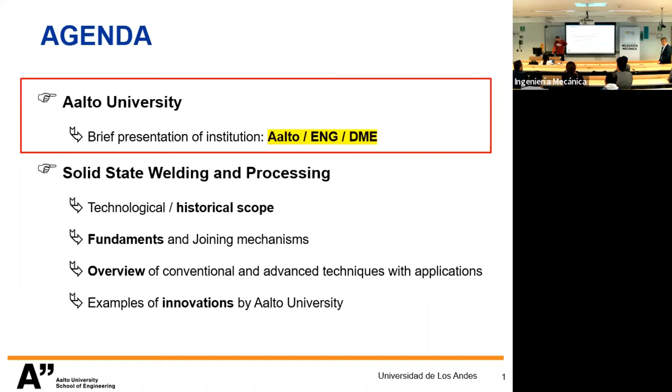Aalto University is located in Finland, north of Europe, in the city of Espoo, very close to Helsinki. Our campus was designed by Alvar Aalto, a magnificent and distinct world architect, and we took his name, and later on you will understand better why.

From where we are to my home university, we have over 10,000 kilometers distance, but fortunately we have open minds and willingness to make this distance very short, taking advantage of our willingness to learn and share different cultures, which brings additional benefits beside the knowledge.

In comparison, the population of Finland is 1/10 of the population of Colombia, with a smaller area and much less population density, yet we represent a very interesting amount of per capita gross domestic product. We are very proud of the cooperation with Colombia, one of the most distinct growing countries in the world.

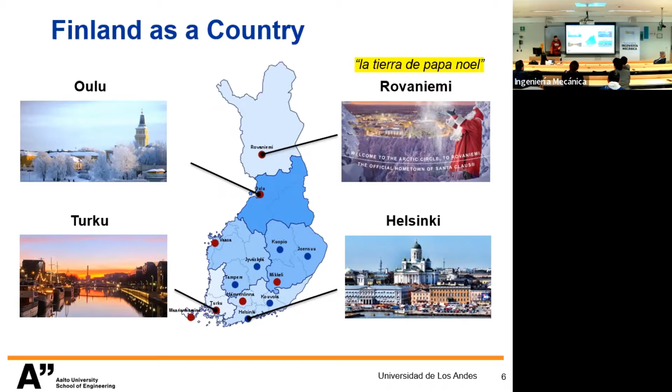Culture is very important - we feed our spirit with culture, distinct aspects. We have this Lapland, Laponia region.

Outstanding is that the country encompasses about 200,000 lakes, and we only count the ones bigger than 500 square meters. We have beautiful landscapes, natural reserves, long sandy beach places, a beautiful archipelago, the Baltic Sea, and magnificent parks all over the country.

Very important in terms of supporting quality of life is the economic impact of the world of industry, and the most important aspect that Finland reached since the Second World War was the installation of world-level competitive companies.

Among these, we have the biggest producer in stainless steel production, Outokumpu, and SSAB, a very important steel mill producing special steels, oriented mostly toward high-strength steels in sheet metal and plate. Meyer Turku is an outstanding shipyard producing large-scale ships and boats, including dedicated production of ships for traveling in ice domains or operation very close to 0 degrees.

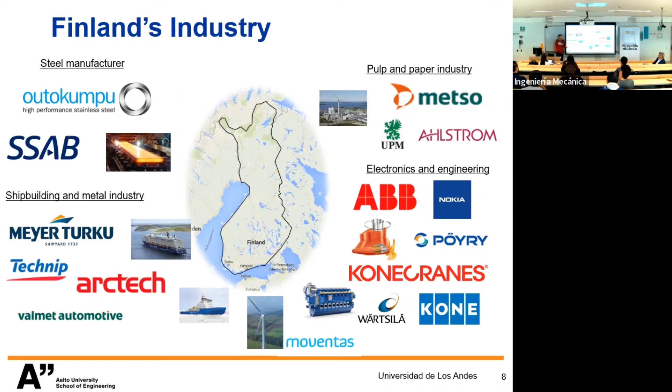And Moventas now also a major player in gear systems for windmills. So we have these outstanding companies that, in a country of 5 million people, play a role of being among the best in the world. And this is the source of this happiness and quality of life. But this feeds also from the education.

Aalto University is a very recent university in terms of installation of its name, but it's based on the merging of significantly old universities, like the Technical University of Helsinki, the University of Arts from Helsinki, and the University of Economics. The name of Aalto is honoring Alvar Aalto, a pioneer of modern architecture and design, who was a professor at MIT. He was an entrepreneur and an artist, a technical artist from architecture but also from design.

And so his name encompasses this technology, art, and business. That's why we adopted, very honorably for us, the name of Alvar Aalto University.

In terms of strategy, research, education, and impact are the three pillars of any university in the world right now. Distinct in our approach is that education and impact are supported by a deep investment in research, and we transfer actively, even in bachelor and master education, but also in doctoral education, the research actions, and we collaborate with companies in aspects of innovation, not so much in aspects of service.

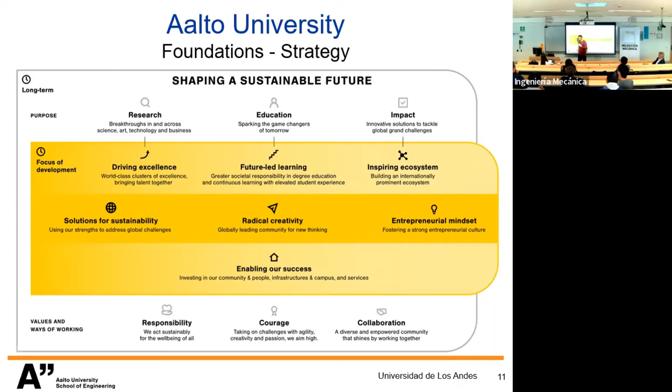So we are committed to impact, promoting innovation in companies and setting up new companies in the economic sector. In terms of numbers, we have about 4,600 staff members, with about 400 professors, and 12,000 students, encompassing master and bachelor students, and we have 1,000 employed doctoral students.

We don't call them doctoral students anymore. We call them doctoral researchers, because we are very proud of providing conditions for them to set their life on a base in terms of funding, conditions for implementing their innovations, and promoting them for further steps in their life. So our doctoral researchers are already active members of society, rather than just students.

I think this number is outstanding. There are not many universities that reach this number of academic faculty staff. 47% is international, and I am one of those examples. So we look for the best, and we don't look for the easy or the local ones.

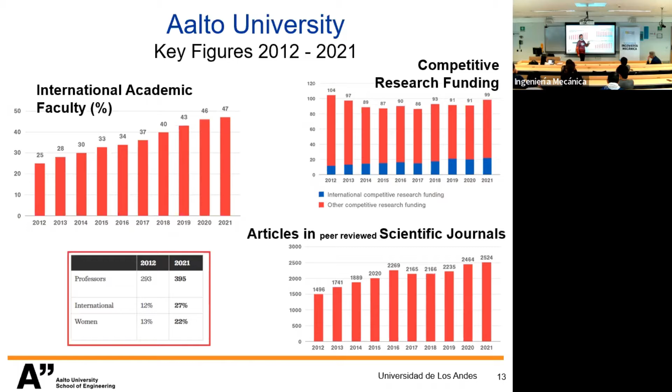This is one of the most important things. Our ranking: in the QS ranking we have 116. Shanghai ranking is between 300 and 400. We have tens of thousands of universities in the world, so this is already very, very impressive.

And among the young universities, we are first in Finland, among the first in Nordic countries, third in Europe, and ninth in the world. Not sure about this ranking for university level overall, we are about 220 to 250. It's already very distinct.

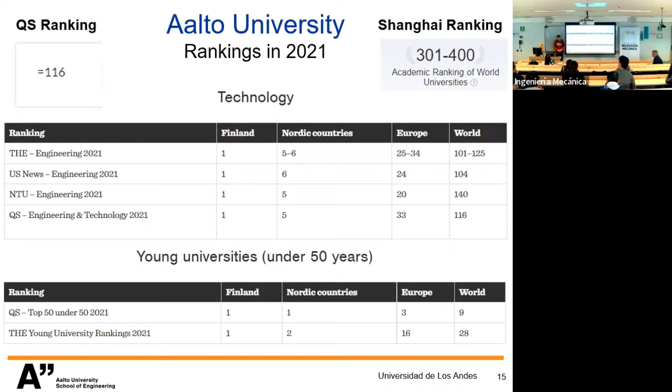Our university operates in terms of research and education, organizing 6 schools. From the Technical University of Helsinki we now have 4 schools: School of Science for IT, chemistry, and physics, through the various scientific aspects and market, then the School of Electrical Engineering, the School of Chemical Technology.

And then the School of Engineering, which encompasses mechanical engineering, civil engineering, and built environment. And then the School of Business, from the previous business school of Helsinki, and the School of Arts, from the previous art school of Helsinki.

Our School of Engineering is organized in this department, as I told, and we are very proud of having some distinct infrastructures like this Aalto Ice and Wave Tank, which is a leading infrastructure of excellence in the world research in ice. And we are located at this very high 60 degrees latitude.

Compared to about 6 or 7 degrees latitude in Colombia, so quite high, dealing with the ice and Arctic, but also the exploration of the Baltic. Such freezing conditions are very important for us.

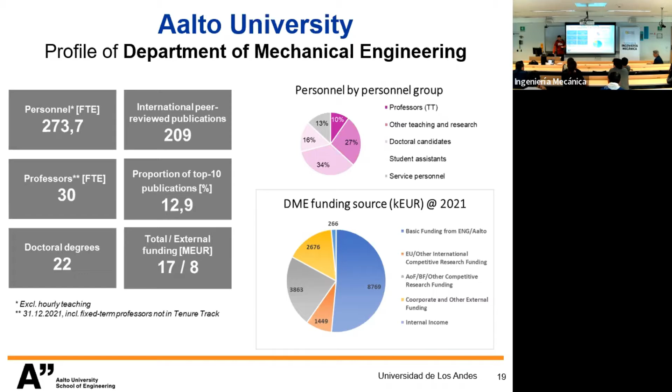So at our department of mechanical engineering, the passion in research and teaching develops solutions targeting social needs and shaping a safe and efficient future generation of materials, manufacturing, structure, machines, ships, energy flows, and systems. The department does multidisciplinary research.

Conversions on Arctic technology, sustainable energy vectors, and digital technology. So these are our main strategic flags: Arctic technology, sustainable energy vectors, and digital technology.

The focus of education is in mechanics and energy science and technology. A good part of the needs of industry generates an impact that can be seen in business and society. So notice that we have research, education, and impact, but in that order.

We are organizing 7 research groups. I operate as head of the group and as head of the department, but my research line is much more in the department of materials. But we have 2 groups of energy: energy conversion, and energy efficiency and systems.

We have marine technology and solid mechanics, encompassing large research in ice mechanics, advanced manufacturing and materials, product development, and mechatronics. We are now striving to have an organization with more critical mass for addressing research, innovation, and impact in these 4 groups, which is a strategic evolution from the previous operation, with a transversal fundamental research which we call in-depth.

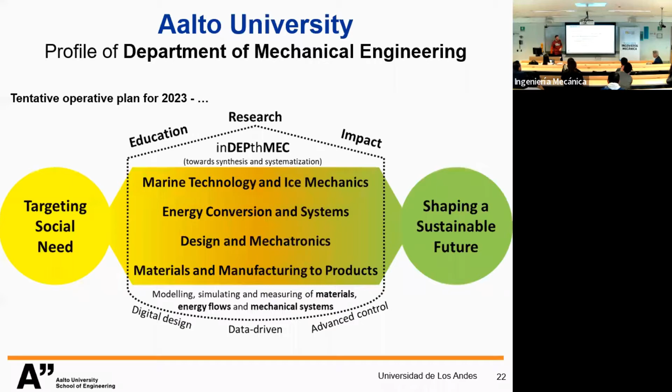So this was the presentation regarding what we are. I think it's important, one of the most important roles that we can promote with this cooperation, and we can address the definite problems of research there.

Or now, how do you see? Should I go on? Probably it's there. So I prepared now a more technical, technological presentation on an issue that is a little bit aside from common awareness.

So most welding and processing nowadays, since the start of the 20th century, is mostly based on fusion, which enables a quite flexible approach to application of energy, processing, and joining of materials. Solid state, although the oldest group of solutions, still provides the most advanced solutions for aspects where fusion welding and processing are not addressed.

So we will start with the technological and historical scope, fundamentals and geometry, and an overview of techniques and applications, as well as some innovations that are coming from my research group in particular.

This is going to be very descriptive, not formative, okay? More informative, more National Geographic. At the end, you'll think you know something, you'll have just an idea that these things exist, and I hope they keep your willingness to go further and make the difference.

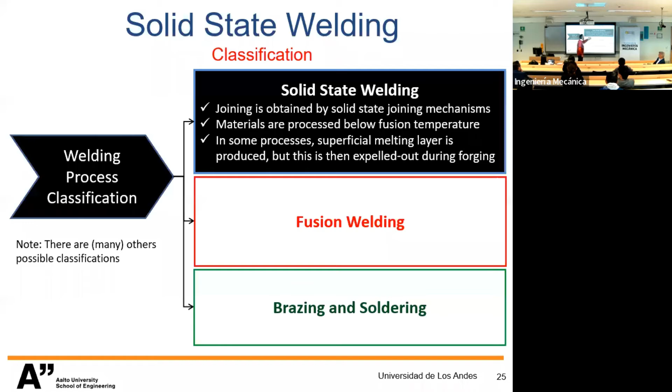Eventually there may be some liquidifying layer in the processing zone, but if that layer is rejected, the joining mechanism relies on solid state concepts.

So forging is at the base of the evolution. Forging and brazing were, in fact, the only solutions for joining of materials since the Bronze Age, encompassing lots of elements that we can see in Museo del Oro as an example. Outstanding constructions, very rudimentary approaches of forging and brazing.

There was a significant evolution at the start of the 20th century. It's the background of the technological innovation that enabled Germany in the first place, but also many other countries in Europe, in a modern wave of taking over the evolution in terms of technology. But it came out as the First and Second World War, first mostly in Europe, second completely in the world, supported by the new construction that was only enabled by joining evolution.

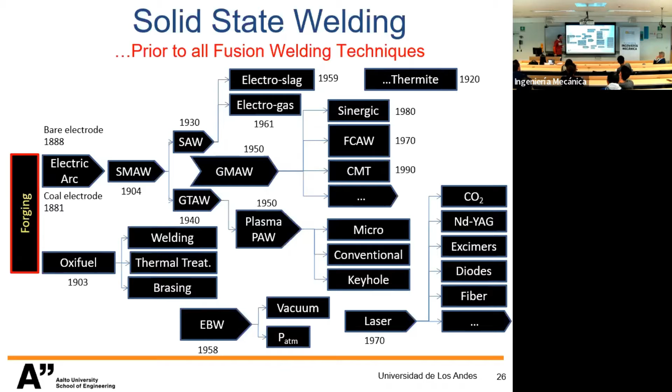A very distinctive, probably the best quality-wise solution is actually electron beam welding, operating from vacuum to atmospheric level of pressures, and also laser, with some more limitations of the photonic interaction between the material surface and absorption. We have different active media that adapt also to different domains of application. These are used in joining, but also in cutting, coating, and surface processing. This is the domain, also in thermal treatment, where this field of technology is applied.

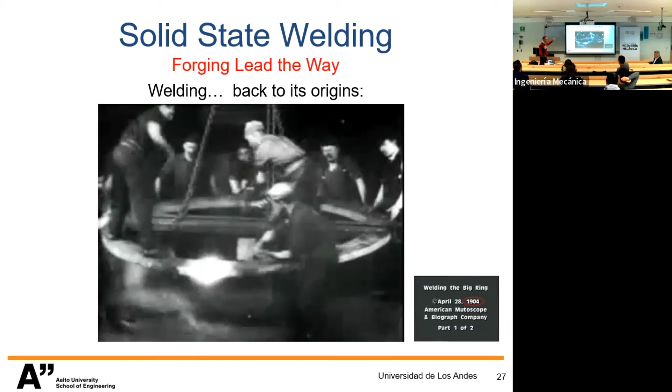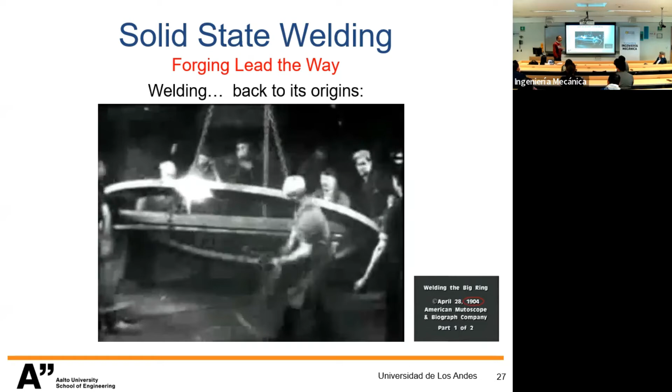We understand that in liquid state it is more or less intuitive that most materials can mix together, and then, based on oriented solidification, called epitaxial solidification, they can be brought into the solid state functional condition. Why was it not possible to apply fusion here before the high power density power sources were available?

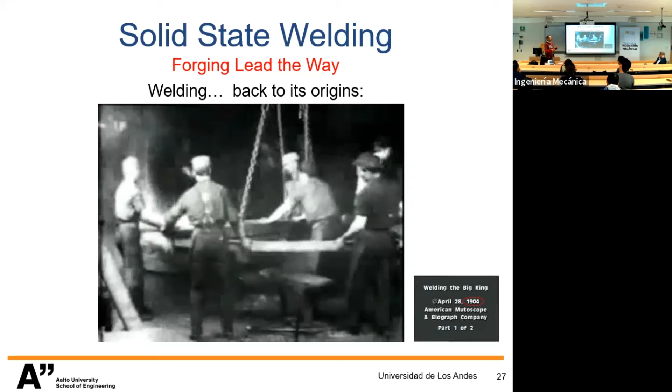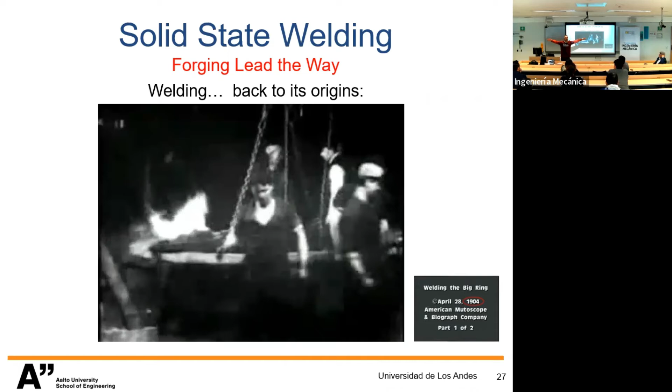So we could only use brazing, where we have filler metal in fusion, but the base is in solid state, and therefore the mechanical resistance is low in solid state. Solid state will really provide a high level of performance, at the same level as the original materials or even better. Anyway, it was not very flexible—it's not very easy to produce forging, depending on these constraints. So what was happening is that the amount of mechanical energy available was not enough to apply the conditions to activate the joining mechanism.

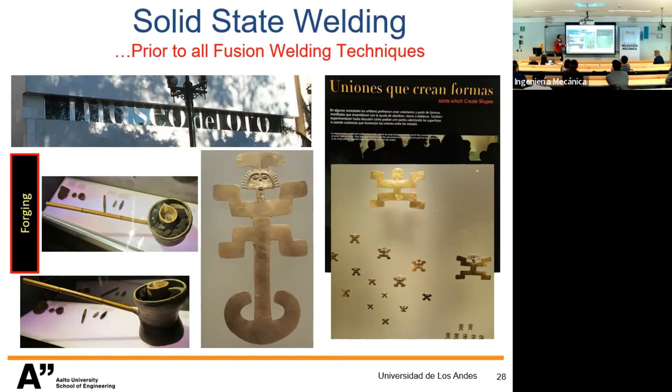So this was mechanical energy, mostly activation. But this knowledge is the base of many of the things that you can see in the beautiful Museo del Oro. And you can see that the complex shape was brought together by forging, already to the more simple shape that was produced by cutting techniques. And so forging and all this knowledge really is close to us, but also provides nowadays the solutions.

Addressing domains of joining materials that are sensitive to heat, or very different in physical properties, like welding an aluminium with a steel. Steel has 1500 centigrades of fusion, and aluminium has 500. So when aluminium is at the melting temperature of steel, it is already vaporizing. And when we have the liquidification of aluminium, there is no liquidification of the steel. So this is an example where different materials can be brought together in solid state, and forging still provides a significant amount of solutions for that field where fusion welding is not able to address.

So there is a domain of energy below which we cannot change the original materials. And why don't solid state materials come together? Fortunately, that's why we can interact, we can sit, we can bring components together. Why don't they come together? Do you have any idea? Because you have to overcome this stability, and there is a threshold of energy above which we can start implementing the activated joining mechanisms, and below which we have no condition to overcome the stable situation.

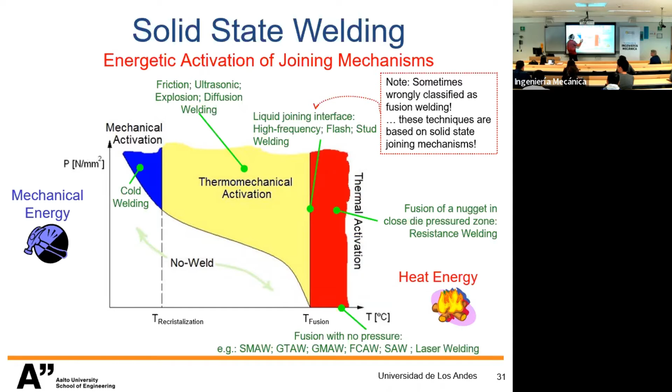The main joining mechanisms are based on atomic bonding. Any two particles, when apart, have some gravitational effect of attraction, but when brought together they start to create repulsion, because two masses cannot exist at the same time at the same position. So there is a distance between any two particles where the attraction and repulsion forces are in equilibrium. At that point, with resultant zero, you have the lower energy of the system. It means that to bring those particles out of that lower energy state, you have to apply energy.

This is the cutting technique. We have it as joining and as coming out. When it is joined, we have to apply energy, and that is the cutting.

This is for low temperature operation, where the distance between the particles is not enough to activate diffusion. We know diffusion from carbon in steel structures, where it's used in general, but diffusion of metallic particles is also possible, with similar atomic radius, and it just depends on the distance between the particles. So when you have higher temperature for manufacturing, you can activate diffusion, which is strong bonding. When you have low temperature, the distance is not enough to enable the mixture of particles, and so you have atomic bonding.

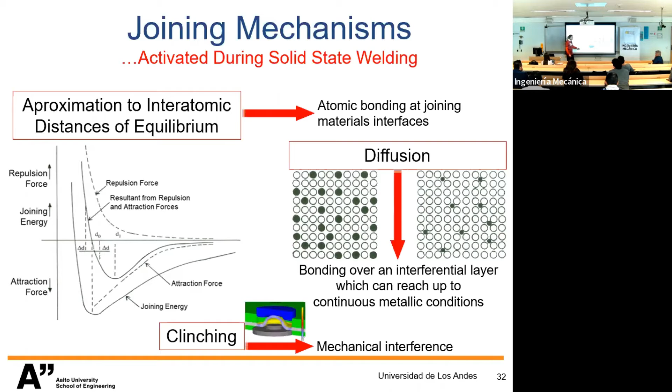We also have mechanical interference, or clinching, that we take advantage of in some domains of application. These are the requirements, and if you understand them, everything that comes after is obvious, and you will be very rich in about one or two months from now, because you will be able to invent something when you wake up tomorrow, and probably set some patent and a company comes.

The world is waiting for solutions of optimized structures that aren't there. So we build structures that are very far away from optimal performance because we cannot combine different materials and different thicknesses in an easy way.

This is not possible to reach without accepting basic shape. So we need joining techniques to bring these high performance materials into complex shapes. Everything lies on the quality of the joint, because the base materials are already very high performance.

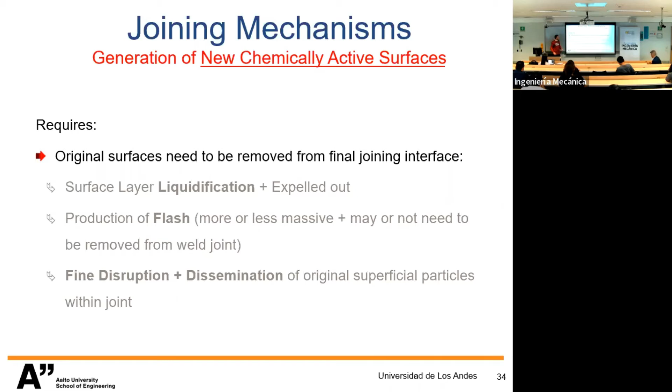So with more heat energy and low mechanical energy, we get more diffusion. We expand the material and bring the diffusion mechanism. With low heat energy and high mechanical energy, we have more atomic bonding. And then there's a domain where we find both diffusion and atomic bonding.

Now we will overview some of the applications of these concepts in existing techniques. Some are more conventional, some are more advanced. The first is high frequency welding.

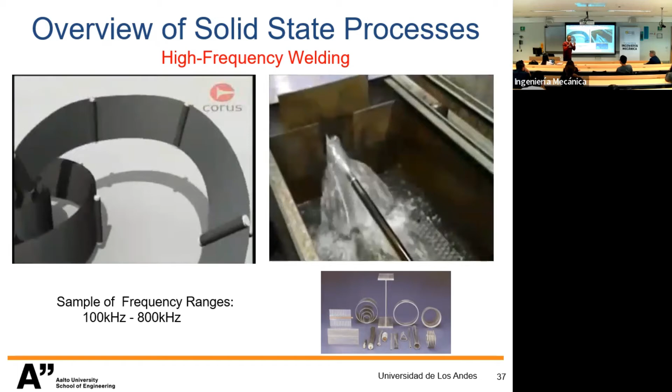In DC current, direct current, you have the flow of energy flowing uniformly through the component. In AC, it starts to get closer to the surface.

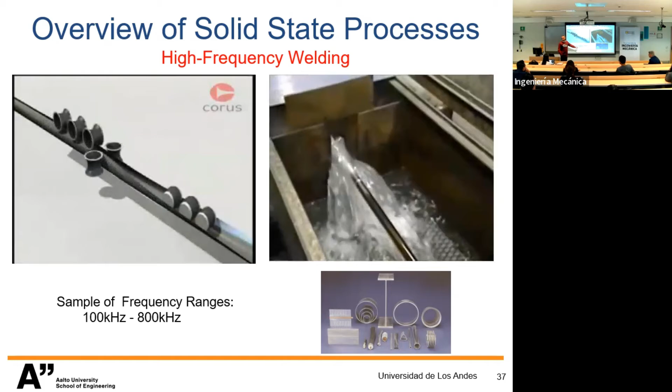As you increase the frequency of AC current, you increase the skin effect. If the frequency is very high - you know the frequency in our network is typically 60 - here we're speaking 100,000 to 800,000. So the skin effect is very high.

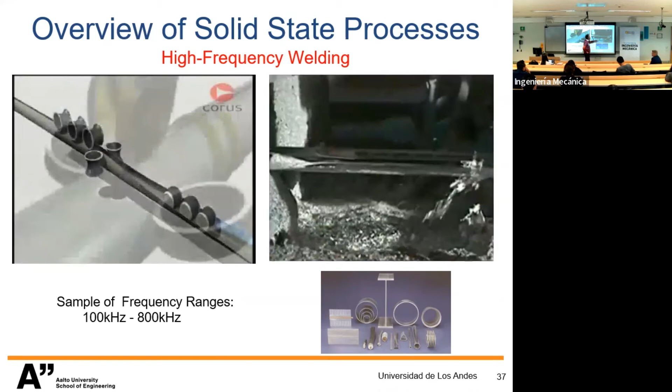You have liquidification of the surface. Materials are brought together, they are formed, and when they are projected after this is the generation of energy - electrical field times conduction zone, contact zone. This is how we produce all these complex closed shapes, typically tubular shapes.

In flash welding, we produce liquidification by high voltage, similar to electric arc, but without the plasma domain. So we don't have low voltage and high current, we have high voltage and low current.

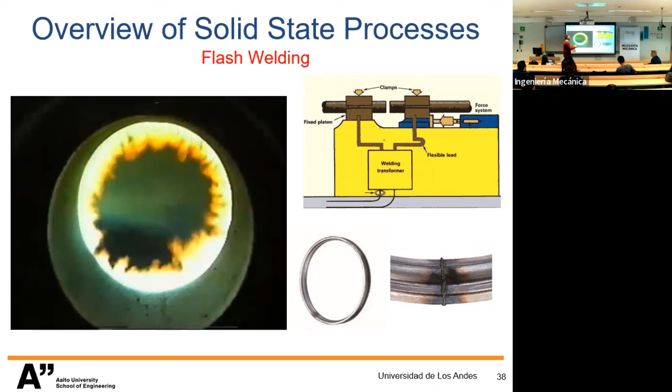There is liquidification, we bring the materials together, the original interface liquid comes out. You have new chemically active surfaces, temperature, pressure, and at the same time we apply mechanical energy, activating diffusion mostly based on diffusion temperature. Because behind the liquidification, you have solid but very high temperature, so the diffusion is very high and the quality is extremely high also.

A variant or specific aspect of this is the welding of studs. In your car, all the interior part is plastic, and the body in white, the chassis, is all metallic. So how do you bring them together? Mostly you weld studs into the metal and then clamp the plastics to these studs. That's an example, but studs, thread studs, etc., exist in many forms.

It's the same as flash welding. You have a very specific profile, something like this in the stud, the body of the stud, and this creates the distance between the base material. Then you have the sparks with high voltage and low current.

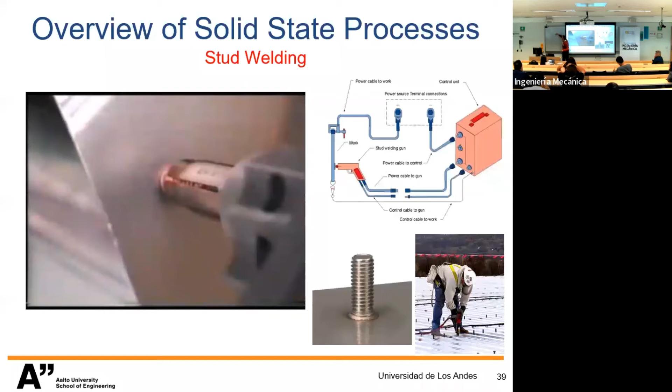You have the spark system, the liquidification of the surface, and then you destroy the mechanical gap providing the element of the stud. The stud is not flat, there is a distance pre-established by the shape of the stud, and bringing them together, liquid goes out, and you have high temperature under pressure generating, sometimes, the activation of joining mechanisms and new chemically activated surfaces.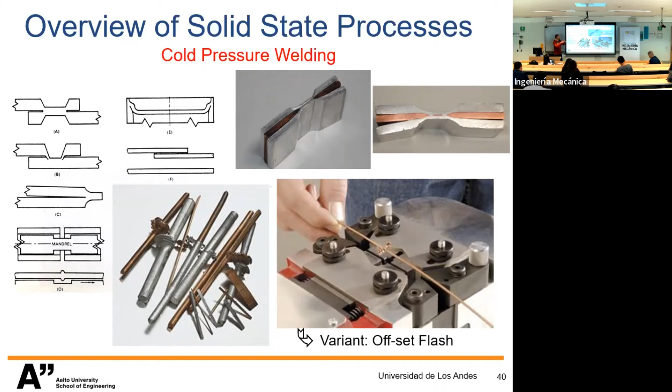In the other extreme, where we have no heat power source, some heat is generated in plastic deformation, and we can bring together materials that are ductile by plastic deformation. This is the offset flash process for welding wires and structures by specific plastic deformation, bringing chemically active surfaces that under mechanical energy activate mostly atomic bonding. You have these Coca-Cola aluminum bottles, beer bottles, welded with clinching and a bit of cold pressure. So you can only apply this to materials that are ductile, because you don't have a heat source, and it relies mostly on new chemically active surface from movement deformation.

Diffusion is the name of a joining mechanism, but also of a process where you don't have full deformation - the surface stays essentially the same. This is one of the most original additive manufacturing methods, where you bring different components together, keeping the original shape, into final components. Every time you apply two components with some inherent roughness, the pressure is not uniformly distributed, and there is high contact in the projected zones between the components. With high temperature, below the melting temperature, you plastic deform the contacting zones, getting rid of the original stable oxidized surfaces, and generating low energy that spreads as a lower energy solution for the metallic system. This is diffusion, produced in ovens with mechanical systems inside and a controlled atmospheric environment.

Ultrasonic welding: in the elastic domain, you undergo a hysteresis cycle.

So you do the elastic tension compression system - we lie to you every time. We simplify the plastic mechanics. It's one of the worst things that we can teach, but we still teach based a lot on Newton's laws and things like that. Nothing exists like that, fortunately, and we know it. Einstein established the equivalence of mass and energy, and the relativity of energy with time. So classic mechanics is essentially a basic formalization of our mechanics knowledge, and elastic deformation also doesn't exist.

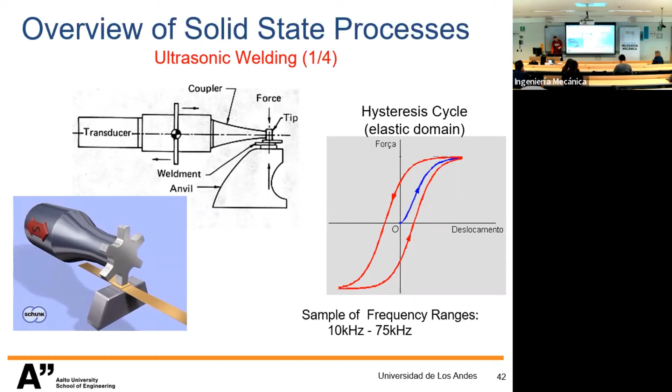One significant application now became a master process solution for joining materials in cables, and the electrification of the automotive industry relies on cables that have an extension of about 50 kilometers in our cars nowadays - 50 kilometers of cables. They are all welded and combined, and all the operation relies on this; only the extremes are mechanically connected and disconnected.

This is the sonotrode that applies vibration in a predefined direction. With this cycle, we generate plastic deformation within the reactive surface, and with that plastic deformation, the heat and pressure drive the matrix formation, and then the joint. So we have atomic bonding and diffusion between the elements of the plate. This is also applied to polymers.

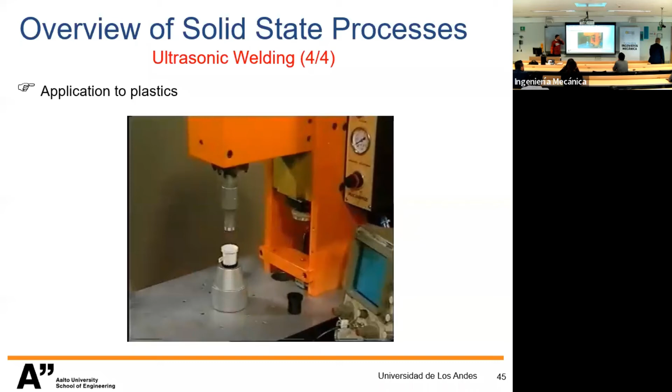Another important process is explosion welding - a very specific domain of application, not exactly a welding process, more a cladding process. One major domain of application is bringing together superstructures and sheets welded to decks made of different materials. You want a deck that is resistant, sometimes double-skin, made of steel, but you want a superstructure that sits on top that is as light as possible so you can maximize load capacity for transportation of people and goods. So you produce the superstructure in aluminium typically, and the deck in steel. How do you bring this together? By fusion welding it is not possible, so you use a cladding of aluminium that is projected and generates plastic deformation. This was discovered in the Second World War from the plastic deformation of projectiles over the skin of combat vehicles.

That plastic deformation generates a chemically active surface, and the heat is such you can see this wave shape, almost the behavior of a liquid interface, because it's this third body domain that behaves as a liquid that is solid, in temperature, with a significant amount of diffusion between the layers and high power.

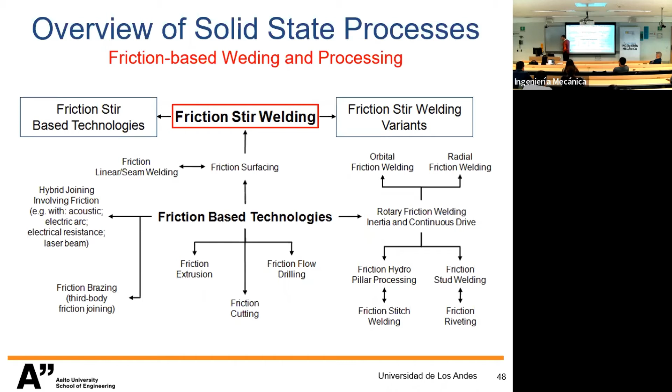There are a significant amount of variants, but even more important than friction stir welding nowadays are the innovations based on the original concept. It was during tests of friction surfacing in the UK that friction stir welding was invented by Wayne Thomas at the welding institute. Friction extrusion is a good example of this creation of new chemically active surfaces with plastic deformation of ductile materials.

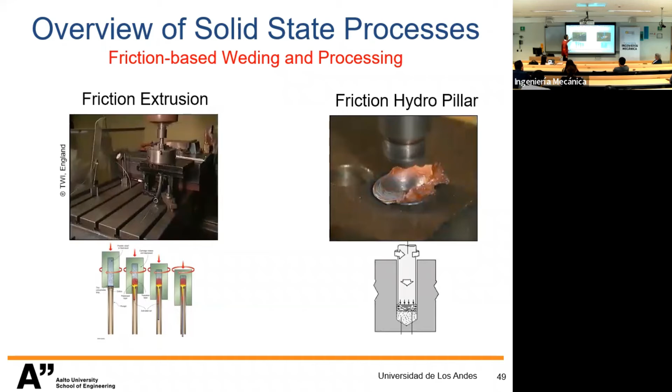Aluminium swarf is brought together under pressure and heat generated by friction. Originally, the viscoplastic domain is produced, and then a new solid compound, fully sound, is able to be produced.

So friction hydro pillar processing - if you understand this process, you understand a lot about solid state welding. It's a maintenance technique where if you find a defect inside of a structure, a joint or something, you drill a hole and then you fill it in with material that has similar or even better properties. All this in solid state, and this is now very important for the area of offshore structures.

So you create a viscoplasticized layer. This is rotating, and that viscoplasticized layer is going to deform the base material, creating a new chemically active surface. And the heat - where is the heat generated?

With plastic deformation, all the energy inside of steel, as an example, is being released by a massive bulk dislocation system. The amount of energy is way higher than any other power source, and localized in the place where the plastic deformation generates the heat, and the heat enables the plastic deformation, and those enable the new chemically active surface and joint mechanisms to be activated.

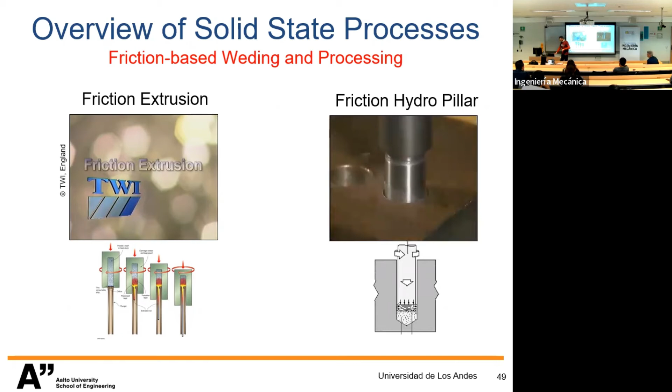So friction riveting - this is an outstanding invention also from a colleague of mine, from Latin America, he's from Brazil but he works in Germany. The internationalization is extremely important for gathering the best brains in these research units - they have impact, and this is a good example of that. He is now an inventor, a professor at Graz University in Austria.

And he invented this friction riveting of metals to polymers, an outstanding difficult job - metal to polymer.

So you see the deformation of the metal when it is inserted in the polymer. This is harder than the polymer, so it penetrates. But at some point, the deformation is localized in the metallic material, that tip comes down and starts to deform inside of the polymer, creating this clinching effect, a mechanical joint. So why is it harder and then it gets softer?

You can speak in Spanish if you want. Because you see the solution, you don't need to invent it, you just need to understand it. But what do you understand? Everything looks obvious when you see it, but creating it is a different game. It's like watching National Geographic - you see the lion jumping on an animal in the feeding cycle and think you understand, but people take lifetimes to understand what hunting really is, the criteria, the social aspects.

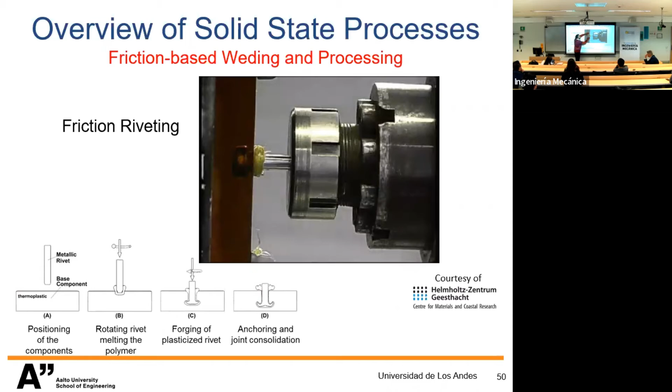The issue is the interplay of physical conditions. The metal is hard but has high thermal conductivity; the polymer is soft but has low thermal conductivity. So you get heat dissipation at the interface between the materials, and the heat flows through the aluminum - as the heat flows, the strength comes down. But in the polymer, which is very soft and has low heat conductivity, the temperature around the processed zone stays essentially at room temperature. So there's a moment where the strength of the polymer becomes higher than the strength of the zone being processed by the metal - that's a gain, a multi-physical gain, a complete paradigm change in the formation process.

It's amazing to understand the mechanism.

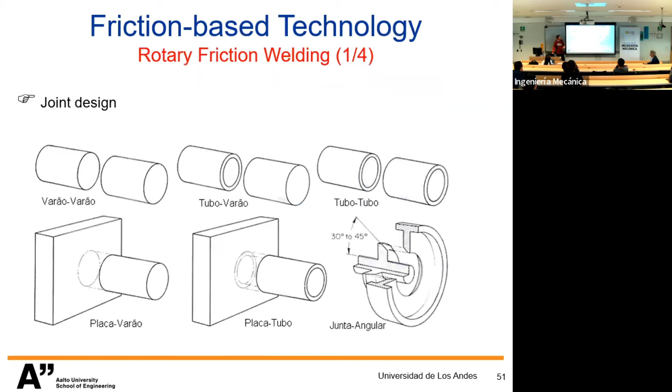Rotary friction welding also has significant applications for joining existing metals. Again, friction is the initial trigger for the temperature to go up and the strength to come down. As it comes down, you apply plastic deformation, which generates heat exactly where it's needed. This plastic deformation also generates a new chemically active surface - original surfaces come down, and with heat, pressure, and some time of forging you produce the joined component, then you just remove the flash.

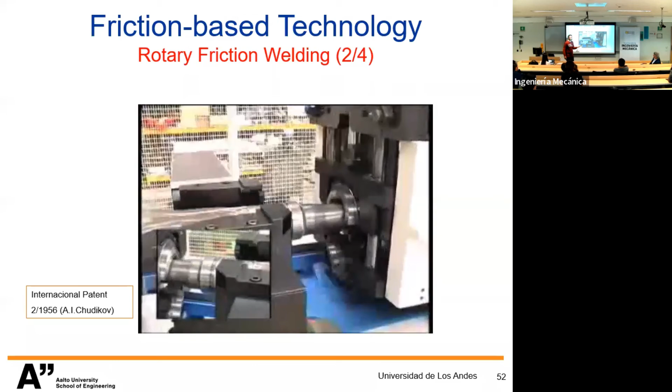A weld in steel of 200-300 millimeters could take 8 hours using multi-pass fusion welding, but we can do it here in less than 1 minute - 8 hours versus 1 minute. And the strength, impact toughness, and quality properties are typically higher than those from fusion welding processes.

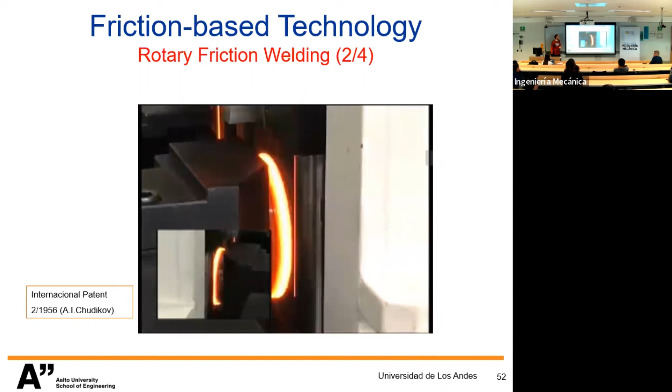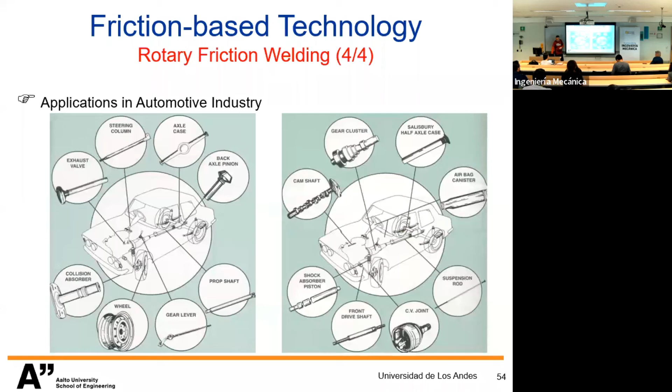This applies to different materials - stainless steel, titanium components - with significant applications. Nowadays airbags are welded in solid state because they have polymers inside the bag, so you cannot close the metal system using high temperature. Although the localized temperature is high, the amount of heat is low, so it won't affect the internal parts. There are also possible applications for titanium-based alloys in linear friction welding. The disadvantage is that you momentarily expose the plastically deformed part to the air until a flash forms and protects it, making it possible to get a sound joint.

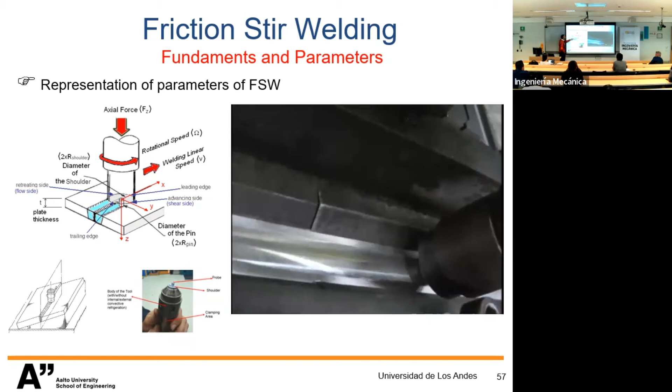We can also produce functionally graded materials (FGMs) with third-party components. We have friction stir welding, where the processed zone is enclosed by solid-state cold material, a shoulder, and a probe that creates the mixing and stirring effect in the processed zone, forming a closed-die system where the plasticized material undergoes significant plastic deformation. The shoulder prevents material from escaping the processed zone, and the probe must be resistant since the tool is non-consumable. This process can follow any path, bringing the opportunity to join materials - aluminum alloys in general are well suited since they are thermomechanically processed.

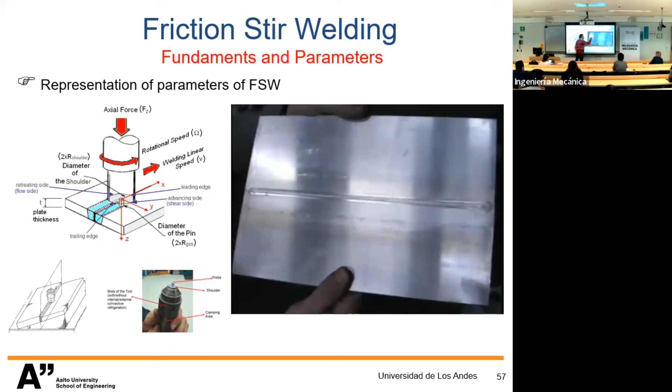This joint is exactly the same origin of the base material strength effect. You can see here applied in a polymer with some traces to understand the three-dimensional flow of the material as it gets away from processing. The material flow provides the heat generation and the plastic flow, and therefore the stirring effect and the quality of the mixture depends a lot on the features of the tool. The geometry and features we provide to the shoulder and probe provides the properties for the processed zone.

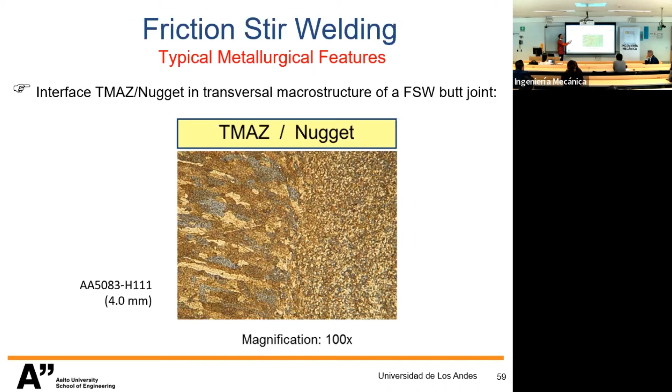You can see the stirred zone, very small grain, with dynamic recrystallization, and this is the original, similar to the original heat affected zone, but processed with much lower temperature than the heat affected zone from the fusion process. Different joints capacities, different materials - very easy for aluminum alloys, more expensive for nickel and titanium alloys because the tool is non-consumable and the price of the tool and material has to grow as we increase the temperature of the processing. The temperature of processing is about 70 to 80% of the melting temperature.

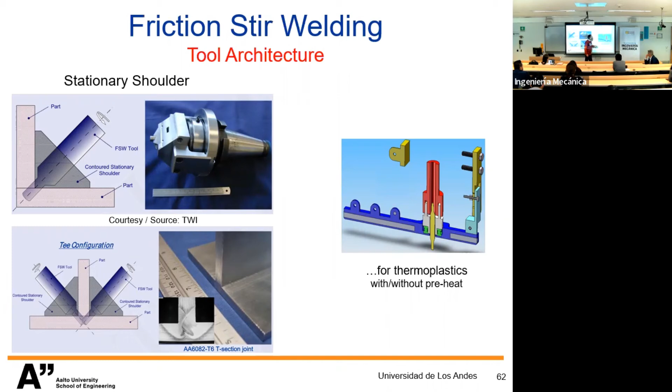We have solutions with static shoulders for complex shapes, and also we can have preheating and post-heating for thermoplastics. We have some innovations with Joule effect for processing the root so that we don't need to go so deep in the processing zone.

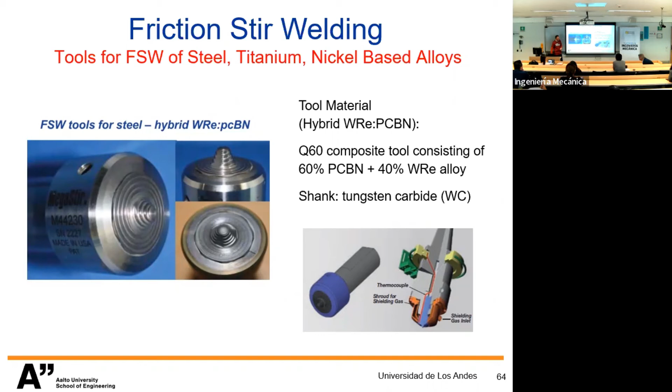These are the tools, the most advanced tools nowadays, made of polycrystalline boron nitride, for processing and welding steels and titanium.

Techniques to avoid the exit hole. I will not take this - I need to jump because the time is running fast.

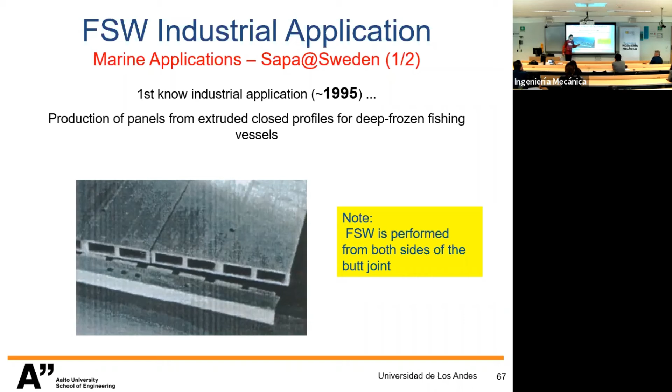We have standards enabling us to address industrial applications. The first application, a baby process in some way, is from 95. Since then we have a large evolution on the scope and domain of applications, mostly still oriented for aluminum alloys, a lot in shipbuilding of floors and several panels, where the price of an extrusion is proportional to the width of the extrusion. So what we do is extrude small components and then weld them together with properties that are equal to or overcoming the base structure.

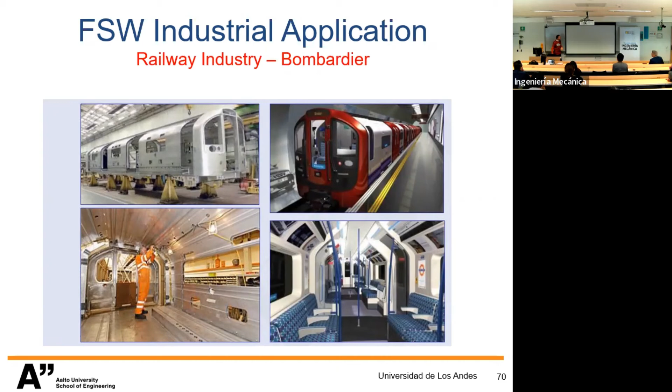There is no welding in aeronautics. Everything is mechanically joined due to the sensitivity of materials, the alloys and titanium for the structure of critical components of aeronautic transportation needs. This is being explored by several components to replace a significant amount of weight. Because everything that exists in mechanical joining demands that you overlap the components, so you not only put third body materials to join, but you have also to use overlapping, which increases the weight of every joint. You have a window with about 7 components overlapped in that zone, just to build the structure and the relation from the internal skin, outer skin, and the structural resistance for the windows, as an example. Now you can produce it in butt joints.

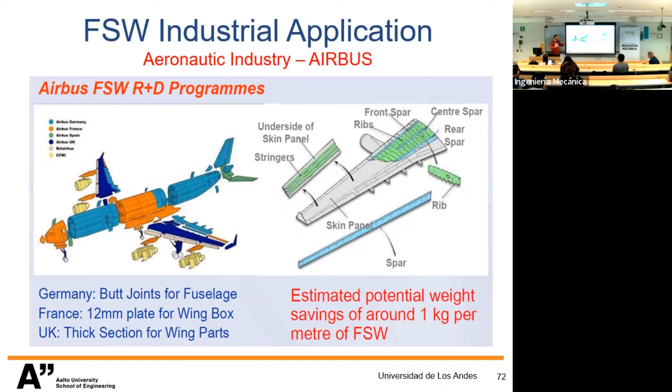Both Airbus and Boeing are exploring a very distinct domain of application: the new space launch system, from NASA, but also a very known company now exploring this commercially. We produce the longitudinal welds and orbital welds in this structure, which produces 61 meter tall joints for the liquid hydrogen and liquid oxygen tanks.

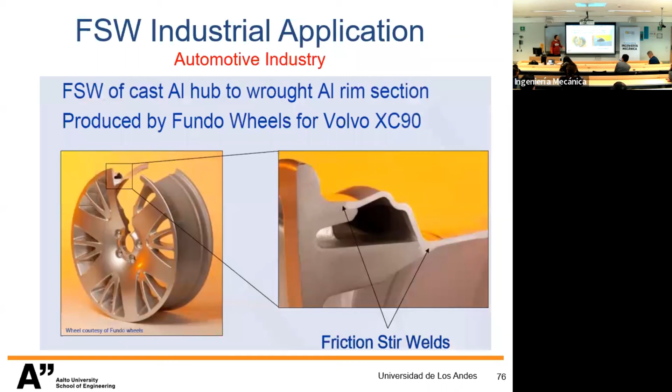Different thicknesses and different materials for optimization in the automotive industry. Same here for some new rims.

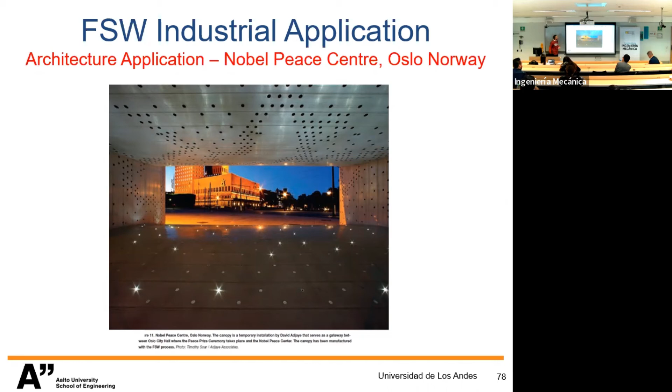A very important field - do we have nuclear power plants? No. For the good and bad, Finland would never be able to support the level of industrialization and live with very harsh winters, long and low temperature winters, without local production of energy.

Same for Germany, same for France. So all industrialized countries cannot rely on solar and wind energy. They play a role in the mix, but the most efficient and safe solution nowadays is nuclear power plants.

This nuclear residual material waste needs to be taken care of. There are many tons of residual pellets that are no longer useful for producing the energy and power density we need, and we need to store them. So we are putting them in cast iron containers to contain the radioactive energy and temperature of these pellets, and then we have copper canisters to protect them from corrosion. These are designed to survive the utmost conditions earth can provide, including earthquakes, to the extreme of life existence. So they are forever.

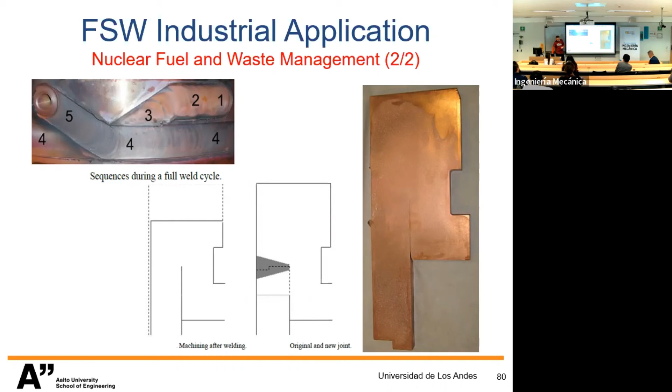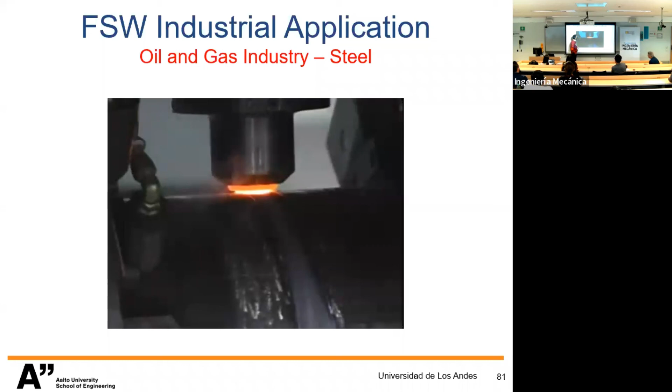This is an application in steel. I'm not sure how much you are aware of the war going on in Europe right now, but Russia and Europe are connected by these tubes and pipelines, mostly for gas now, and the new pipeline that existed is just ready to be used. It's not really sure it's actually going to be used under the current political conditions. But anyway, this explores the efficiency of welding locally or even inside.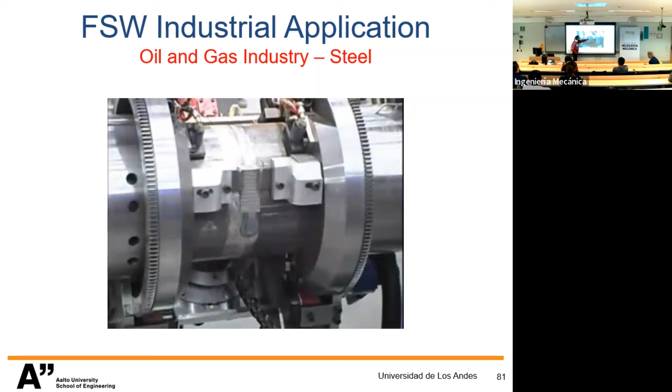With the automatized system, it runs over the start, comes out in a runoff bar that you can machine out. You can see the temperature. So I will leave a comment on this for time.

So we apply it also in healing of castings, for better distribution of properties in casting components, and in metal matrix composites. We can also reach fine grain superplasticity behavior locally, and this is the friction stir processing.

Another evolution from friction stir welding that provides a different result is friction stir channelling. We are able to produce closed subsurface channels that can take any path in the material. So think about how you can produce a closed channel inside, in one action, that can take any path.

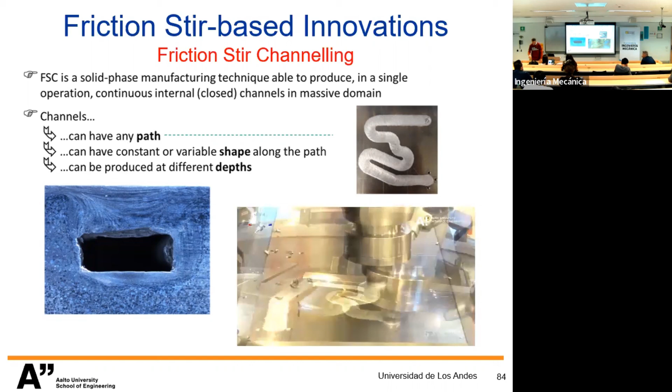You can drill, or you could even produce it under some circumstances with casting, but it cannot be very complex, otherwise you cannot extract the shape from the inside. So now we are producing these channels that can take any path. This is for conformal cooling, a dedicated path that goes exactly to the most preferential heat transfer locations. This is an important solution.

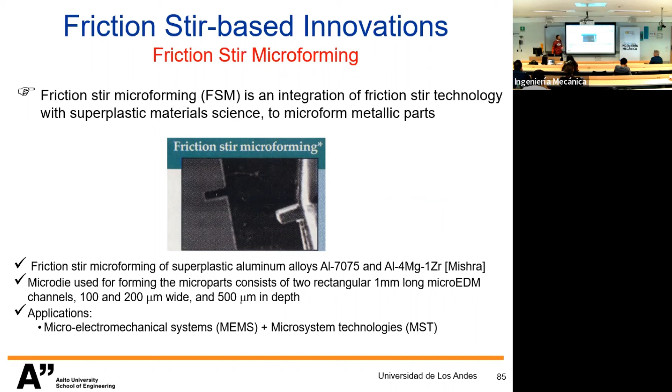Because of the viscoplastic domain, the material being processed takes the shape of the anvil of the tool, so we can have micro forming. We can also have this self-embossing forming.

This is friction spot welding. So instead of doing it with fusion welding, we can do it in solid state. Welding aluminum with resistance welding is extremely difficult because it relies on resistance to generate heat. But if the electrical resistance is low and thermal conductivity is high, doing it with fusion is extremely complex.

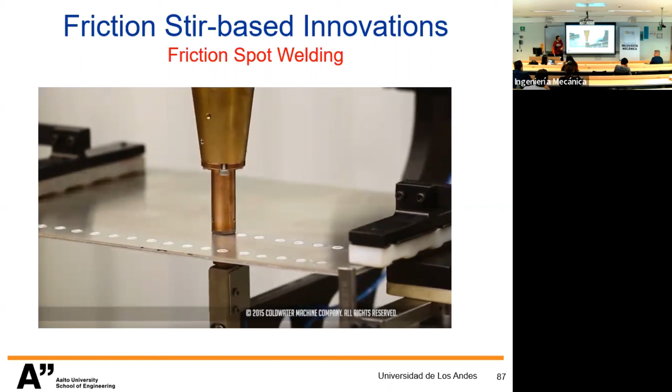Additive manufacturing concepts for near-net shape manufacturing. And we come now to the last item in our agenda. I'm sorry for the extra time that I've taken from you.

One distinctive evolution that we promoted at our research unit was taking advantage of the flash that you saw in friction surfacing. Now we are using the flash to produce tubular shapes without any weld, and so we produce tubular shapes without any matrix and without any weld.

Tubular shapes are produced by this complex welding process of forming and welding, or they have to be extruded. In steel, for large cross sections they are extremely difficult to produce. The amount of tubular systems produced in big tonnage is the minimum amount economically viable. We can produce it in several materials - stainless steel, aluminum, titanium - with uniform or different thicknesses, varying the shape.

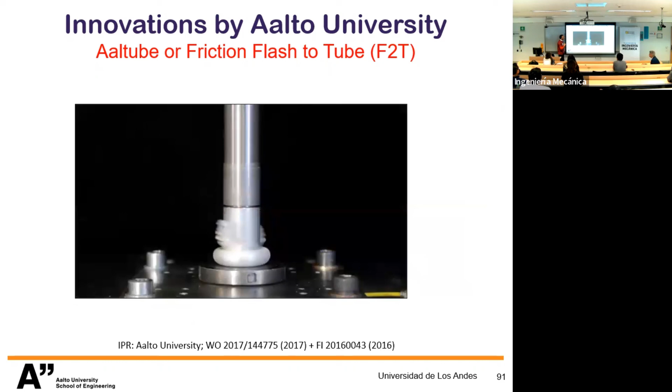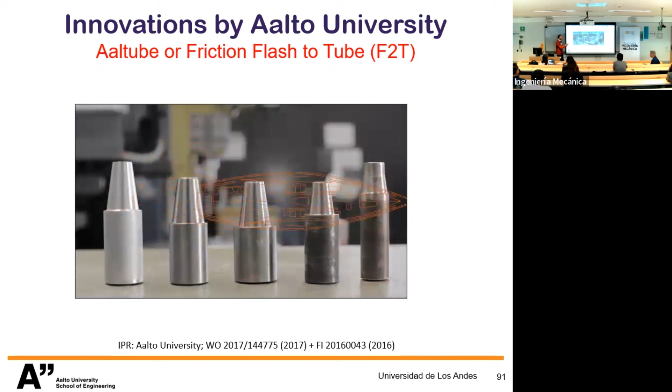This is a tentative spin-off company, Aaltube, in the early stages of evolution. You can see the concept of manufacturing based on flash with no dies. We produce a cylindrical shape and can change the thickness and shape according to the plunging conditions. It has very significant impact in applications waiting for small tubes in specific materials that don't exist in the market.

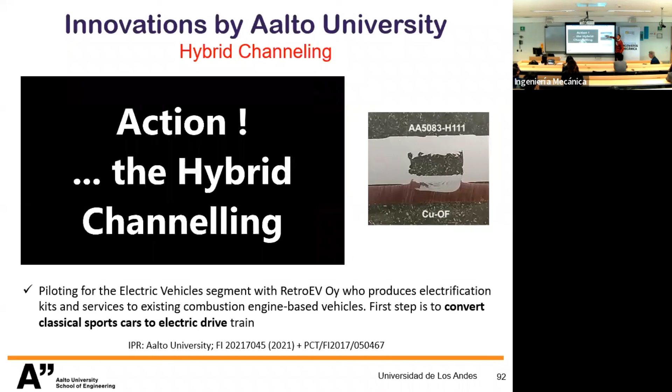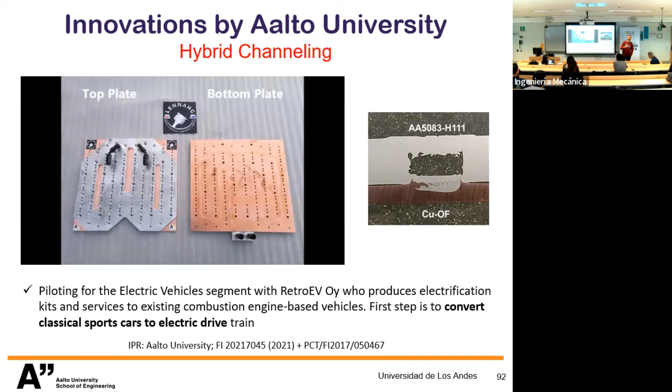Another example is the evolution of friction channeling we saw. Now we produce channels, but we're also able to weld different materials in the same operation - a channel in a bulk material and then a weld. This combines properties, so we can use copper, which is expensive and heavy, in a very thin sheet to do thermal management of the system. All mechanical and electronic systems require thermal management, otherwise energetic phenomena are dissipative and temperature jeopardizes operation.

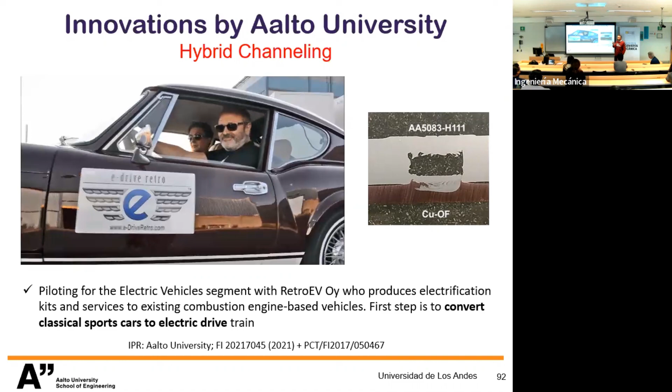Everything we do, even for us - you run, you sweat, you have your thermal management immediately. Otherwise you die, and you cannot live very hard. All the materials of this mechanical system have that.

So we use copper here to do the thermal management, then use low cost and light material to manage the copper's temperature, with no interfaces. This is now being explored for several applications in aeronautics for electrical motors - we go inside with copper doing thermal management, then use aluminum to manage the copper, which in turn manages the stator, as an example.

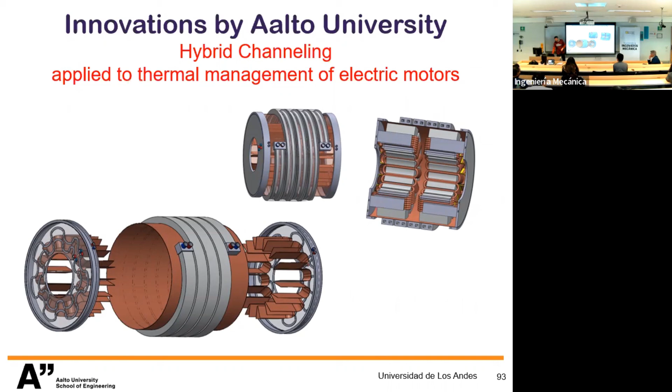Or also for batteries - again we have aluminum, for electrical aeronautics and battery systems that need thermal management and very light weight. We use air with natural convection for thermal management. Our aluminum system manages all the battery surface in one action. So we have the skin and the thermal management unit, and by hybrid channeling we're now able to produce positioning and thermal management decomposed.

The new big step in our innovations is joining metal to polymer in linear joints, and we are quite unique in that way in the world. We produce linear joints between aluminum and structural thermal polymer, which is big here, or polyether ketone, by a mixture of clinching and some small scale diffusion.

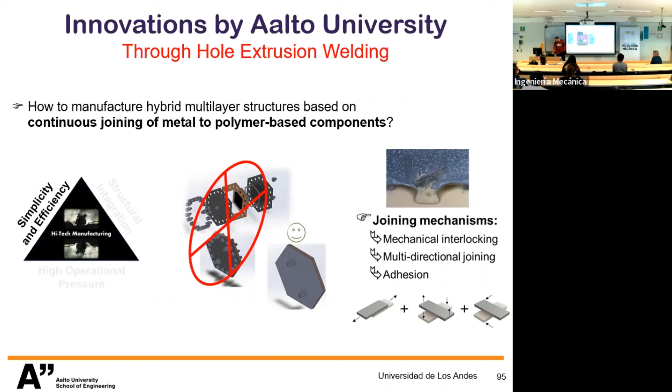This is the joint. These are tests of the joint that are fracturing always in the weakest material, taking the strain of the weakest material - quite high performance. How does it work? We deform the aluminum, and the polymer goes inside with a similar volume - the aluminum goes inside the polymer and the polymer goes inside the aluminum. We have the clinching mechanical interlocking effect, and at high temperature also some adhesive and small diffusion.

Extremely strong joints. The temperature for material flow of aluminum is about 400 degrees - the aluminum behaves like this. We're able to deform it and close the surface in three-dimensional flow at 350-400 degrees. The polymer melts at 120 degrees and vaporizes at 180. So how can we produce this?

We use these extrusion matrices made of titanium, which has very low thermal conductivity, so they protect the thermal energy we transfer from the aluminum into the polymer. They are harder than the aluminum, so they're used as extrusion tools - we extrude aluminum into the polymer, protecting the polymer from the energy necessary to extrude.